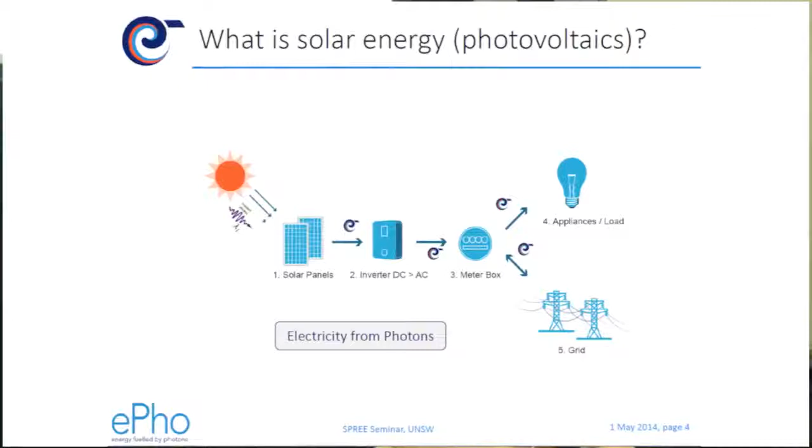They hit our solar panels, which convert the photons into DC electricity, direct current, which then gets converted into AC. That electricity is either used on the premises in appliances or loads, or it gets exported to the grid. At this stage, when we propose commercial solar, it's very rarely about off-grid or isolating a business from the grid. It's always just substituting the need of drawing electricity from the grid. That's what commercial solar is about for us.

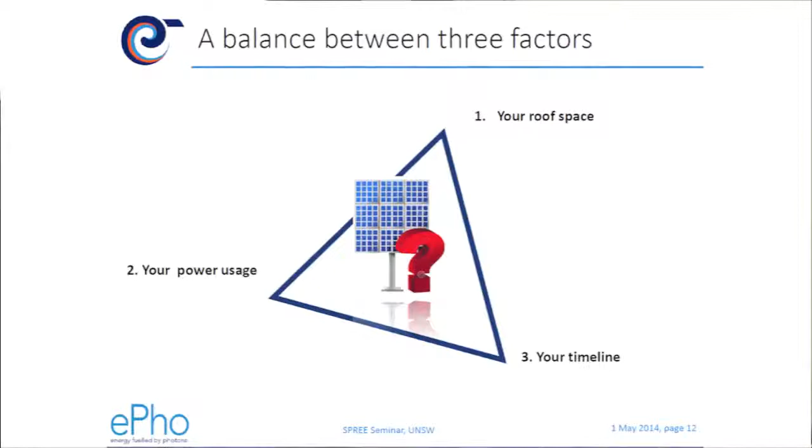Second thing is your power usage. If you are a restaurant and you only open at night, commercial solar just wouldn't work for you. That's one of the fundamentals. That's why I said earlier, at the moment we're really only talking about commercial solar to substitute electricity need from the grid. If you then talk about storage and other things, obviously everything changes. However, if you look at the economics, as soon as you package battery storage or other things into it, the economics don't stack up anymore at this point in time. It will over the next few years, but today, if you only look at the economics, it's only solar that substitutes your need from the grid that matters. So your power usage is very, very important.

And then timeline. So when we talk to clients, it's very important what they want to do with their business going forward. If they say, I want to sell my business next year or shut down, it's a very short conversation about solar - we might move on to the next topic. So timeline is a third factor that needs to make sense.

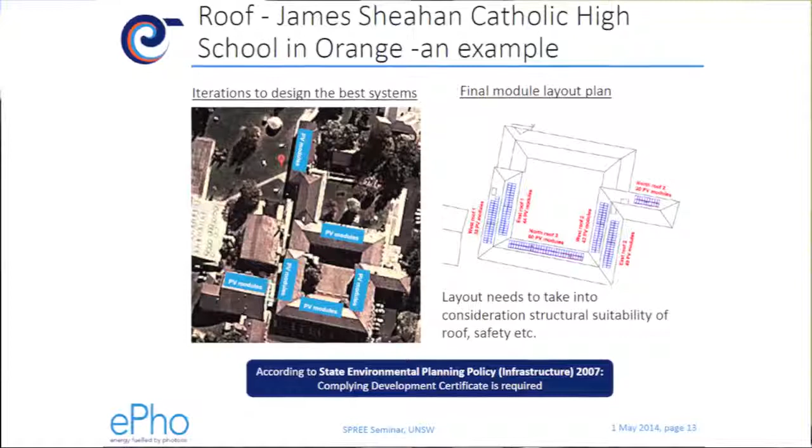Okay, let me just quickly run you through some stuff. This is an example of how it works in real life. This is a big Catholic high school out in Orange. Lots of roofs there, so we went through an iterative process to find the best roofs. At the beginning, it's really just a matter of marking some of the roofs that would be suitable, or potentially suitable, for solar.

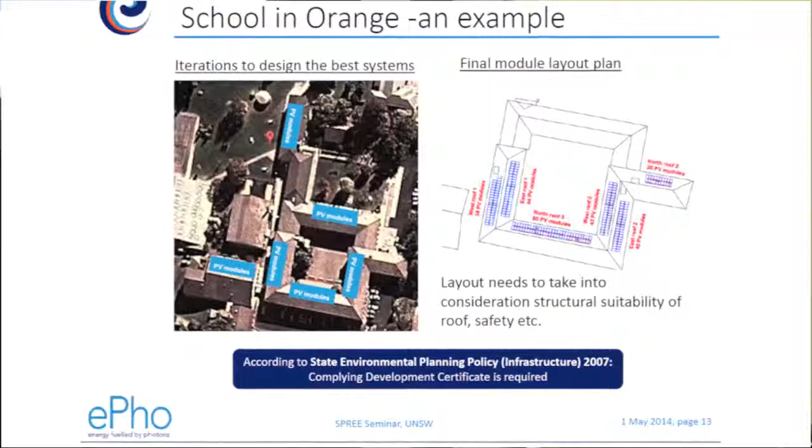And then we jump from there into the detailed layout where we do the proper design. In some cases, when the structural engineers come in and verify that the building or roof is actually suitable for solar, it might turn out that this wonderful north-facing roof is not suitable because it was built earlier, maybe in the 60s, and the roof structure is just not strong enough to carry the additional weight.

So we had to rule that out and went back to the drawing board and readjust it and try to measure that. Another thing which I put up here is one that we come across a lot at the moment here in Australia when we do commercial solar.

There are hundreds and hundreds of solar companies in Australia, ranging from very small ones, literally just a man and his ute, all the way up to big companies with hundreds of employees.

Normally, a residential system is installed by a guy who takes his 6 panels in the morning, drives to the residential home, gets out, climbs on the roof, puts the 6 panels on the roof, and walks off, and the job is done in 2 or 3 hours. No real design requirement, and very rarely is there a site visit up front. It doesn't really matter that much.

On commercial solar, however, the world changes. It varies a bit from state to state, but let's say in New South Wales, when you go over 10 kilowatts, you suddenly need a complying development certificate. It's not quite a development approval, but you need to go through council to get these certificates. You have to talk to the grid providers and so on. There are a lot of little things.

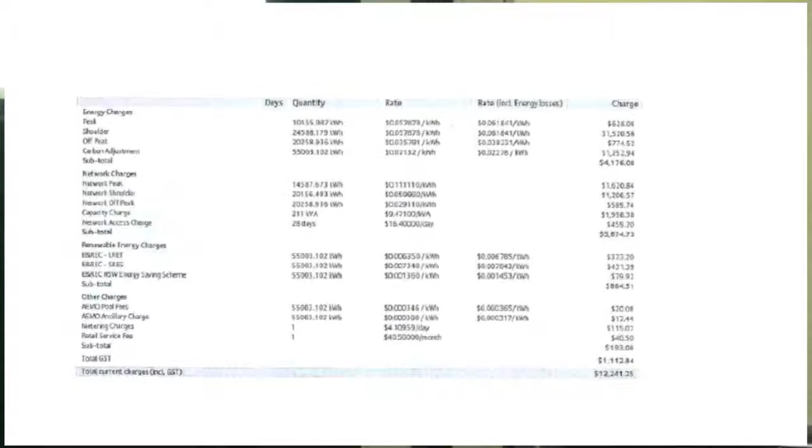If you then go to larger consumers of electricity, that changes dramatically. It's actually a real science to understand what's happening on these different bills. There are about a dozen or so different charges. Some of them are charged against cents per kilowatt hour, so the actual usage, some demand charges, some daily charges, and some other fixed charges.

So you have to plow through here and actually find out what your solar system would actually substitute. Obviously, a solar system doesn't substitute a daily fixed charge—that will be there whether you use solar or not, because you're still relying on the grid. So it's quite a lot of work to sift through this kind of information.

So once you have understood your electricity bill and you're basically trying to extract the value of your solar, the next thing you need to do is understand the consumption of your particular client. What is the commercial business actually using? In these circumstances, we get half-hourly data, so we analyze 17,520 data points over a 12 month period.

When you're a larger consumer, you basically get that data from your retailer, and they then pass it on to us, and we do a lot of number crunching. That's one part of the equation.

The other part of the equation is the generation profile of your solar system. There we basically run a simulation where we also throw in random weather data—we say, okay, we have a rainy day, we have a good sunshine day. Because it can happen that you have great sunshine on a Saturday or Sunday, but the business doesn't use any electricity on Saturdays and Sundays. You obviously have to take that into consideration when you evaluate the benefit of what solar is creating.

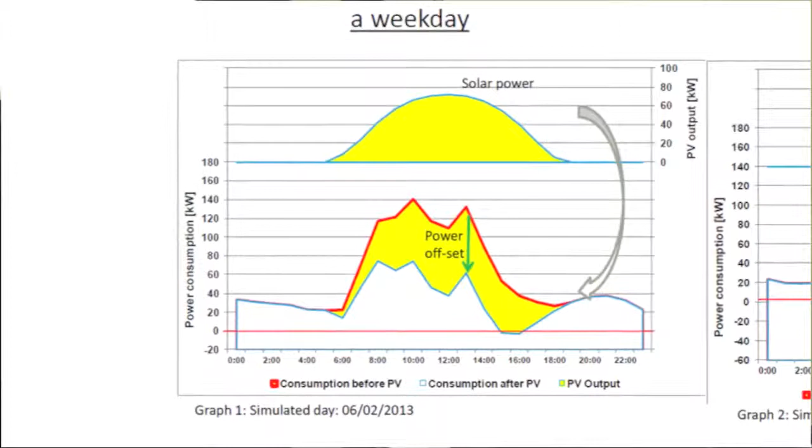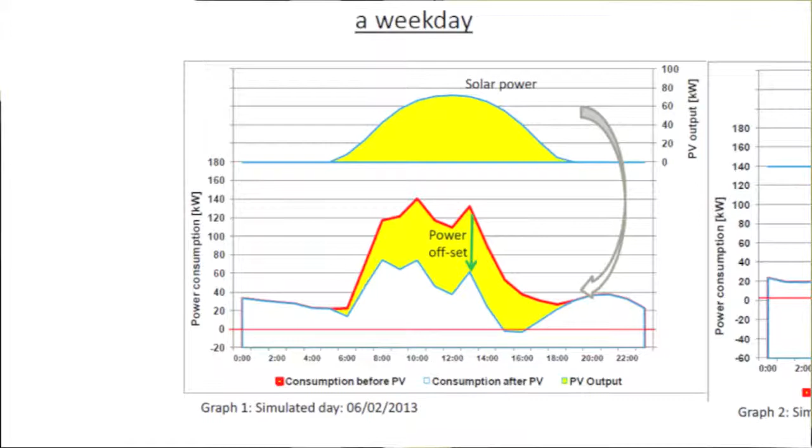The solar system on this particular day, the 6th of February 2013, would have produced this amount of electricity. It was a very nice sunny day, and this is what we would have offset. The new profile of the school would have been this little blue line. The yellow area is the savings the solar system would have generated - that's the value the commercial solar system has. On a weekend, you have that sunny day, but the school hardly uses any electricity, and most of it is fed into the grid.

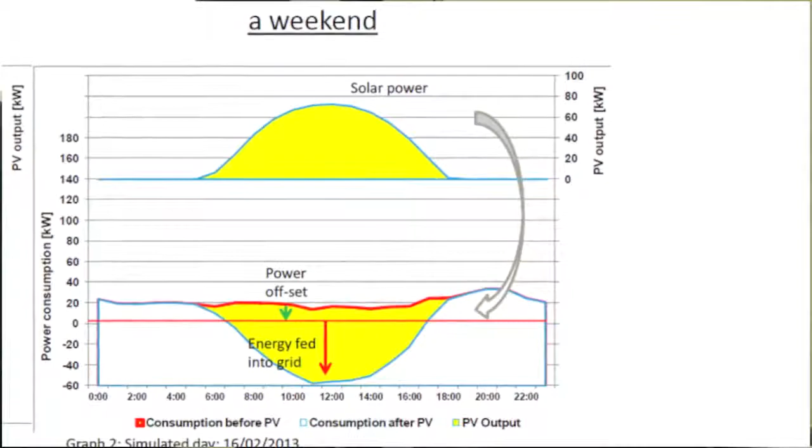Now the problem is, with most of the electricity fed into the grid, you get 0 cents per kilowatt hour - just the way it is. You might be able to negotiate something with your retailer, but it really depends on your buying power and your retailer.

So we go through that, day by day, and extract how much we would really save the school or the client. In this particular case, we will save the school about 30% of their electricity, and the school actually saves $30,000 per annum. They pay back the system in about 5 years. So it's a very good case, and because it's a Catholic school, they had the money as well to invest directly.

And that's quite an interesting concept, because in economics, normally when you have supply and demand, the price that a good should go to is actually the marginal cost of producing an extra unit of that product or good. Obviously here it's a kilowatt hour - that's the benefit, that's the good that's produced here.

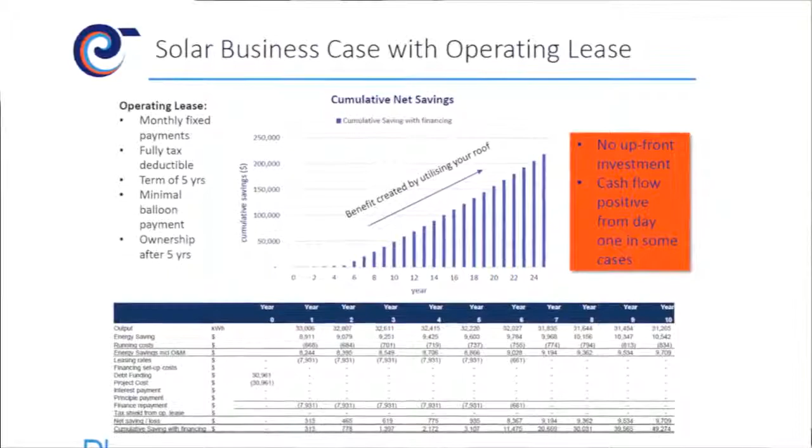What's happening here is basically that the solar system is financed by an operating lease. So just quickly, if you're not aware of the concept: normally when you go to the bank and you borrow money, or you have a finance lease, you're the owner of the system and you just pay your rates. Yes, the bank or the financing company might keep the right to the system, but in essence it's about you getting ownership of the system. Then the system is yours and you depreciate it over the 20 year period, and you pay back your principal and your interest. With an operating lease, it's very different.

You don't own the system. The operating lease is a pure expense, so it's fully tax deductible, which is a huge benefit for commercial businesses. Normally when you have your operating lease and let that run over 5 years, you have a minimal balloon payment at the end—this means you pay maybe one more month and then it becomes yours. So from your expense line on your P&L, it goes to your balance sheet.

The attractive thing is the following, you see it here. The first sort of 5 years during your operating lease, you're basically running a black zero, which means that whatever you're paying for your operating lease is offset by your savings from your electricity bill. In some cases, particularly for small to medium-sized businesses, it actually means they're saving money from day one, because their savings on the electricity bill is bigger than what they have to pay for the operating lease.

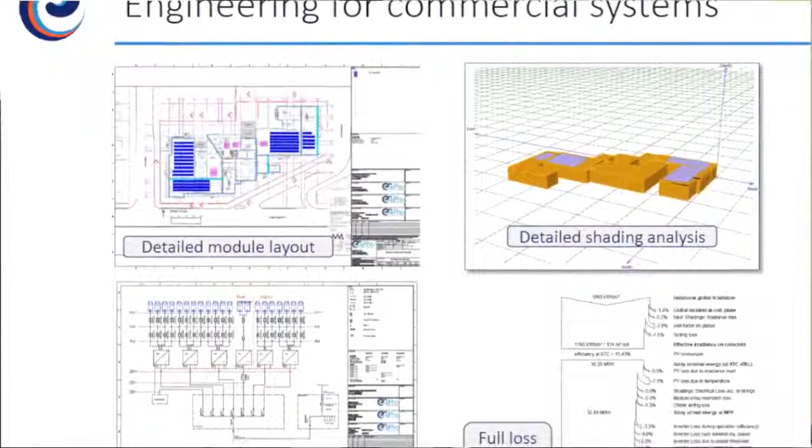And this is the stuff which I'm talking about - there is quite a lot of engineering work required. Now, this is a 100 kilowatt system on a new aged care facility, a big one, where we had to deal with a lot of HVAC stuff on the roofs, with fire escape stuff and so on and so forth, and we had to make it all fit nicely onto the roof space.

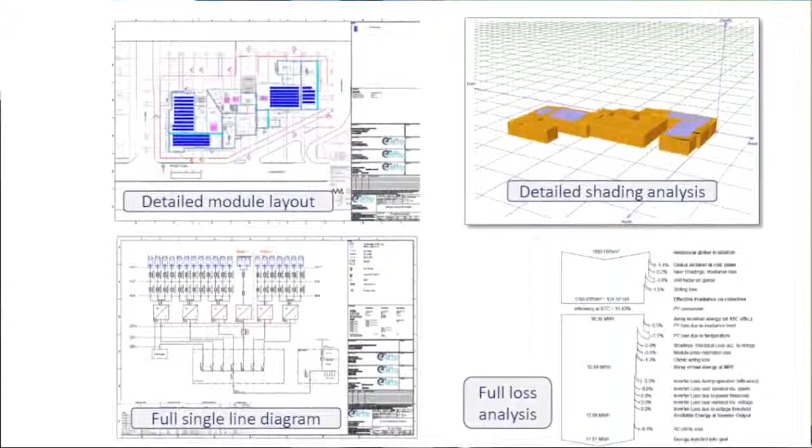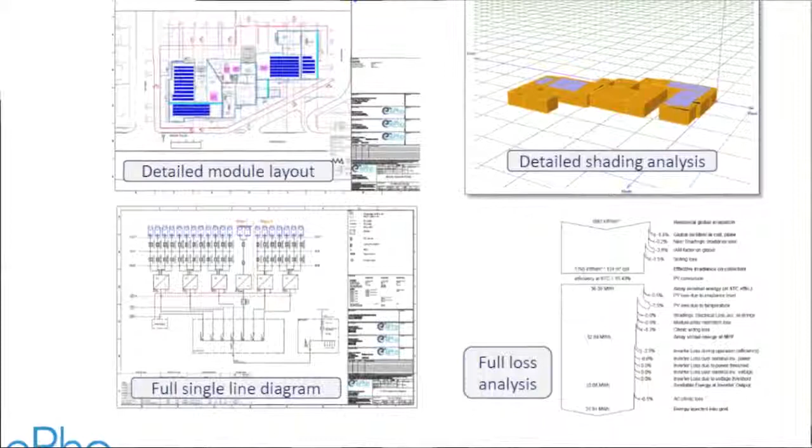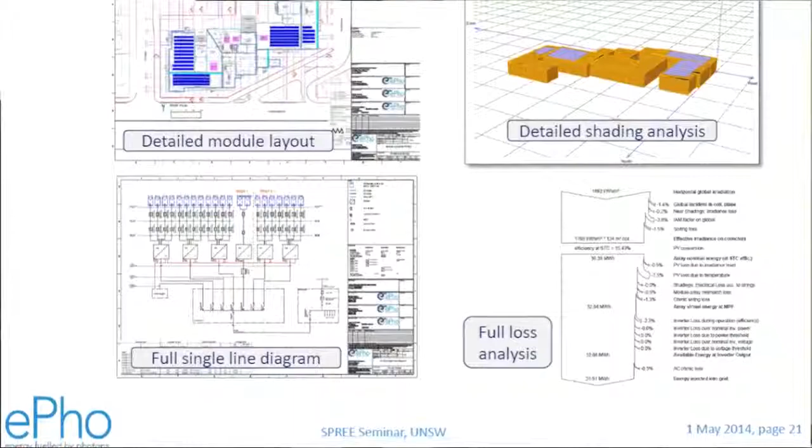We obviously then have all that different roof areas, and we do a detailed shading analysis. Obviously, if you have a larger system, you really need to be able to do the full single line diagram. You need to be able to talk on eye-to-eye level with the network provider to actually get the grid connection done. And you need to do a full loss analysis to know, well, this is the sunshine hours you get onto your roof. What do you actually get out at the end of the day after you subtracted all the soiling losses, shading losses, ohmic resistance in your cables, and so on and so forth. So there's quite a bit of work involved.

And if you want to go further, and I want to see if this works, you can actually go to some very extreme levels. In this circumstance, this is a building in North Sydney which has two massive billboards. And when we looked at it, we thought, why are we trying to actually put a solar system on there? It's really shaded. So we thought, okay, well, let's not just let our guts decide this. Let's do the full analysis. So we can.

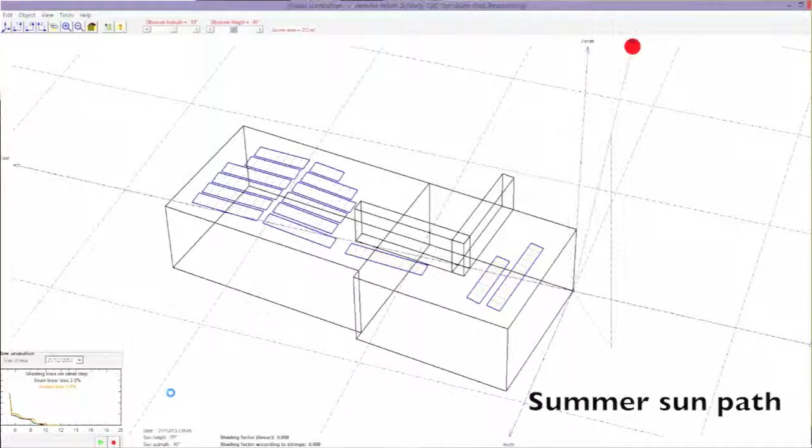There is supposed to be a movie where we really analyzed the path of the sun, summer and winter, where we exactly look at the shading during the day. In the summer, hardly any shading, and in the winter, when it obviously comes in much lower, we have more shading. And all this plays into extracting the value of the solar system to make the economic case for the client. So he's got all that at the moment, and we think the system still makes sense, so we are waiting on whether the client wants to go ahead or not.

Now, the other thing is what I said earlier, it is quite a lot of engineering work, and just this level of detail you have to watch out for.

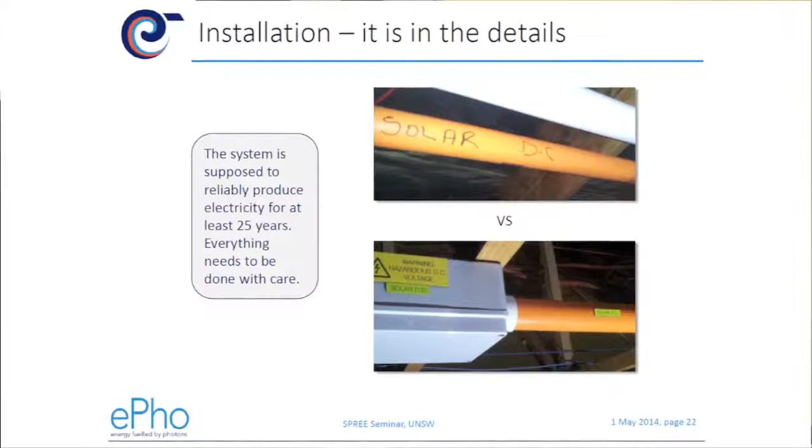The second part is really the installation. This is how typically residential systems get installed, and already this is a good installation because at least the conduits are marked. But in reality, if you think about the commercial systems where the investment can be 100,000, 200,000 or even more, do you really trust that this permanent marker is permanently on there for 25 years? I would doubt it, right?

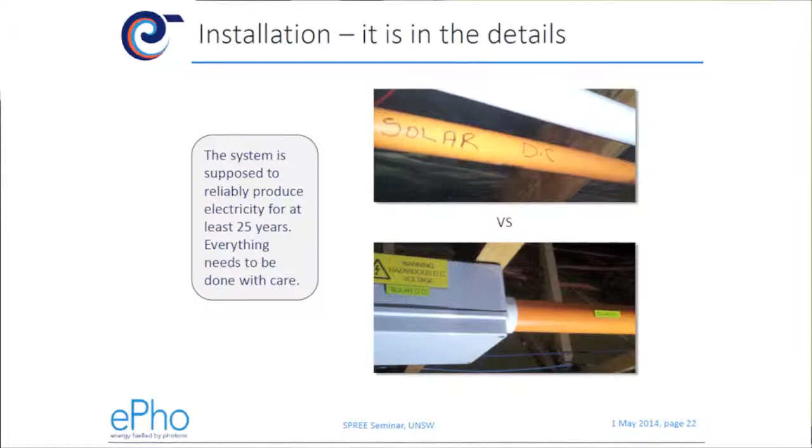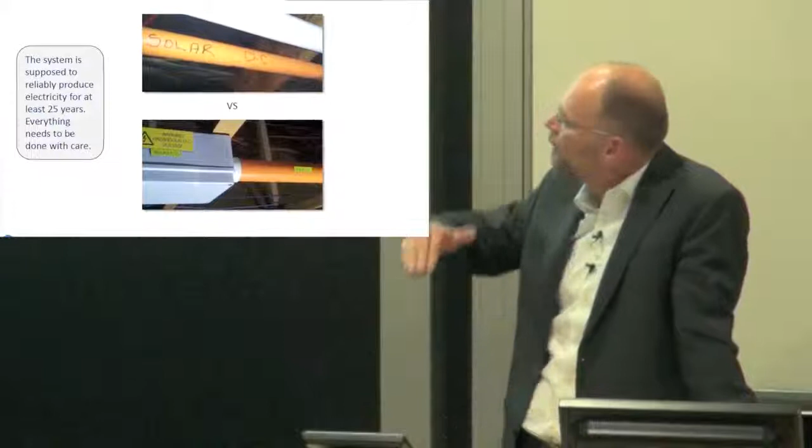So what we think, and how some companies work with quality assurance programs and something like that, you basically have proper, like in any other commercial electrical industry, that we do this properly. But believe it or not, it is quite a step up for the industry. Our Australian solar industry is completely geared towards the residential market, and it will be a general development which we have to live through in Australia.

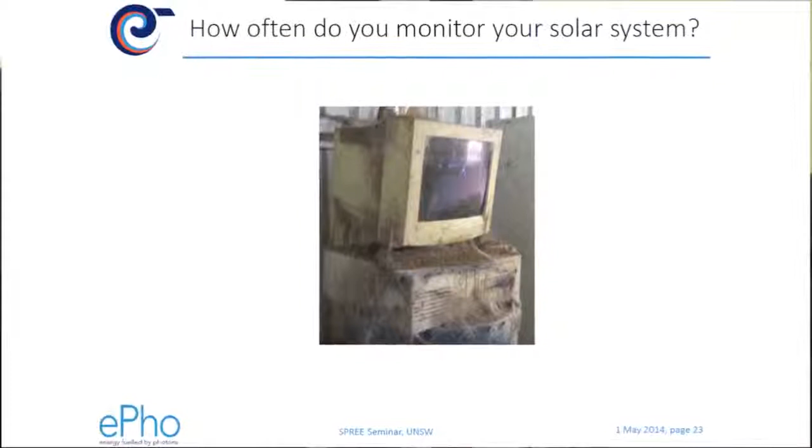The other thing is on the monitoring side. Less than 1% of solar systems are monitored in Australia, and that's quite remarkable considering the system is supposed to last for 25 years. My bet, and I think a lot of people would agree, is that we have a lot of solar systems in Australia that actually perform below what they should. For whatever reason, whether it's components, installation, trees or soiling, it doesn't matter, but people don't really check how well their system is performing.

This is obviously very different for commercial solar, because you are actually selling a return on investment and a value proposition. So you can go into a lot of detail on forecasting commercial solar. And one big factor you have to take into consideration is obviously the sunshine.

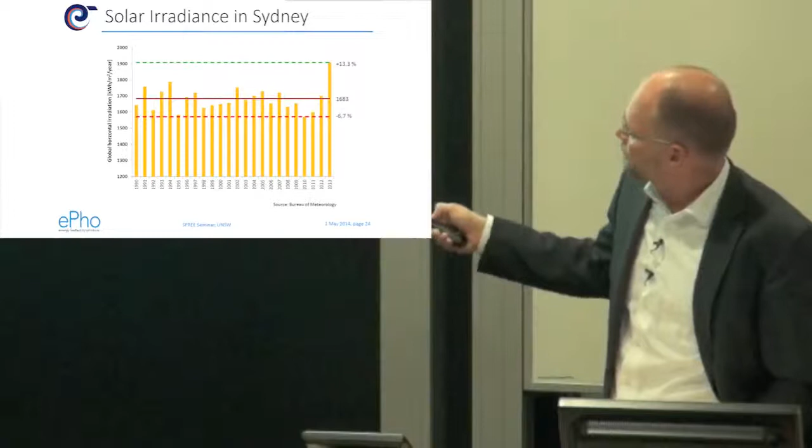It is fluctuating quite remarkably. This is Sydney, and you see the average sunshine data here from 1990 all the way to 2013, and you see the long-term average. That long-term average is what goes into your financial modeling, but in reality it can fluctuate quite significantly from year to year. If you have that honest discussion with your client and show them this is what can happen, you manage expectations quite differently than if you just take the long-term average and say, no, it'll be all right, mate. It might not be all right.

Now, when you put forward the economic case to your client, you also need to discuss with them what can happen, and what are the variances around this expected rate of return. If you're a bit more sophisticated and want a more honest discussion with your client, you can actually go into statistics and do probability analysis.

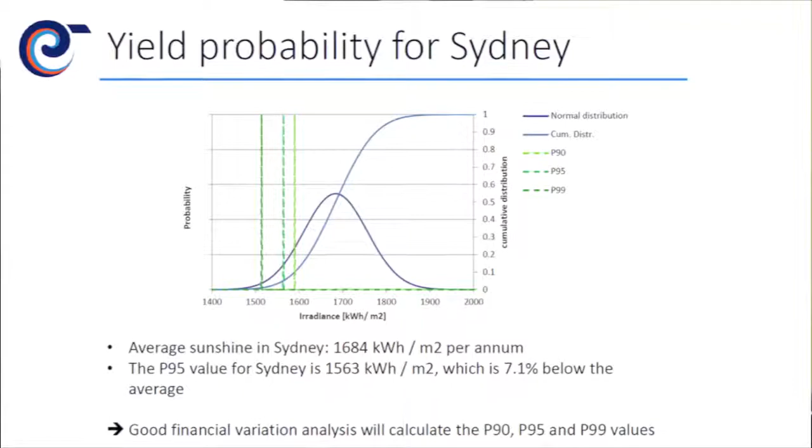What I showed you earlier was the annual sunshine in Sydney - that's basically the peak of this distribution curve. On average, we have about 1680 or 1690 kilowatt hours per square meter of sunshine, and we assume it's normally distributed. It's not quite correct, but it's an assumption we make to simplify things - it's just been too long since I learned statistics, so I take that simplification. You then see the cumulative distribution, which obviously at some stage goes towards 1, because the sun has to come up.

What you can then do is basically a P90, P95 and P99 analysis. For those who work in wind, it's a very clear concept there - it's basically the probability of 90% that you have a value greater than that P90 value. In wind that's standard practice; in solar it's not yet, but obviously you can do it - there's no reason why you can't.

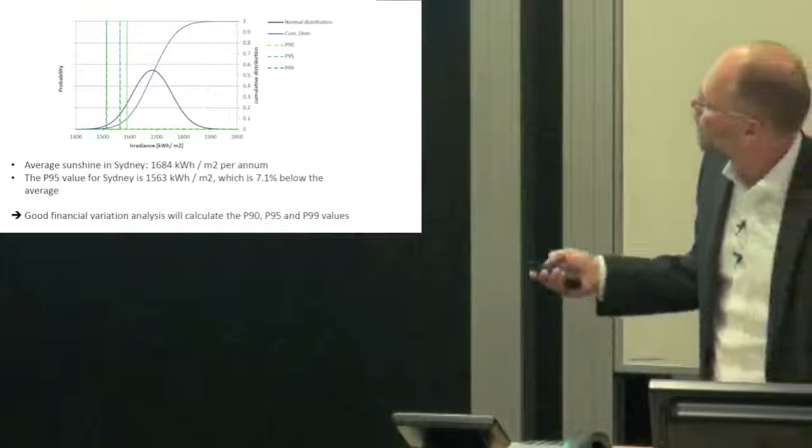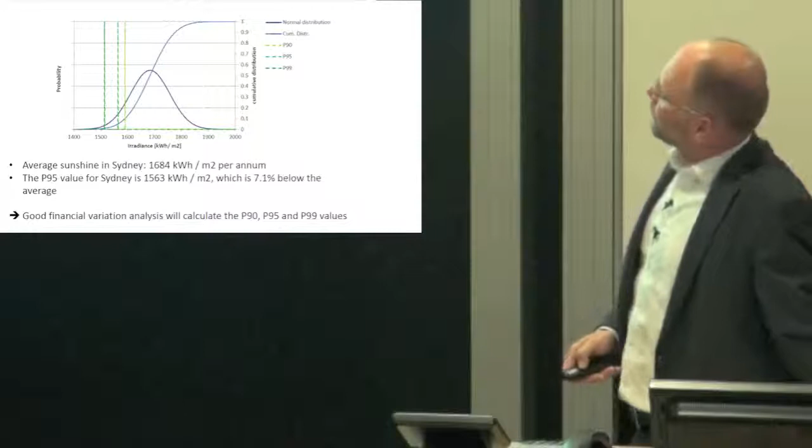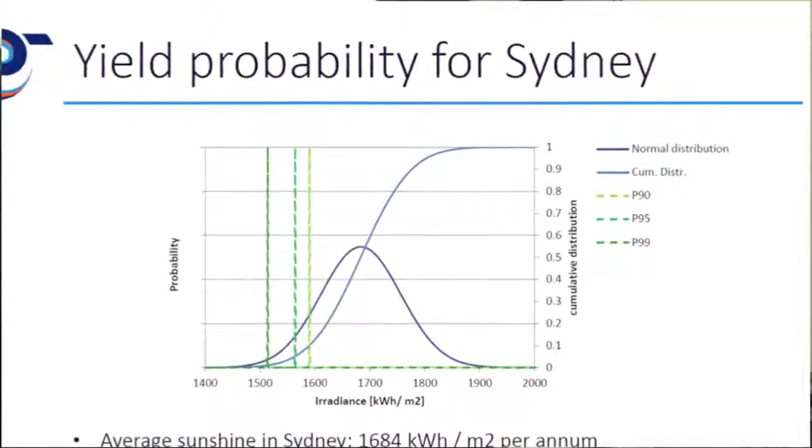So what you see here are the values of the P90, P95, and P99. If you wanted to tell your client, with a probability of 95% you will get that return per annum, you basically have to take your P95 value for your commercial analysis. In this case, for Sydney we have 1684 as the average value of sunshine. For a P95 analysis, you take 1563, which is about 7% below the long-term average - so with 95% probability your customer will get a return in that particular year if you use this value as an input for your sunshine data.

Through this, you can basically build a lot of credibility and trust with your client, particularly when accountants, auditors and others come in and try to challenge you on your value proposition. You can argue, okay, we've gone through this variance analysis - this is the case for solar, and this is the likelihood you will get 15, 20, or whatever percent return in any given year.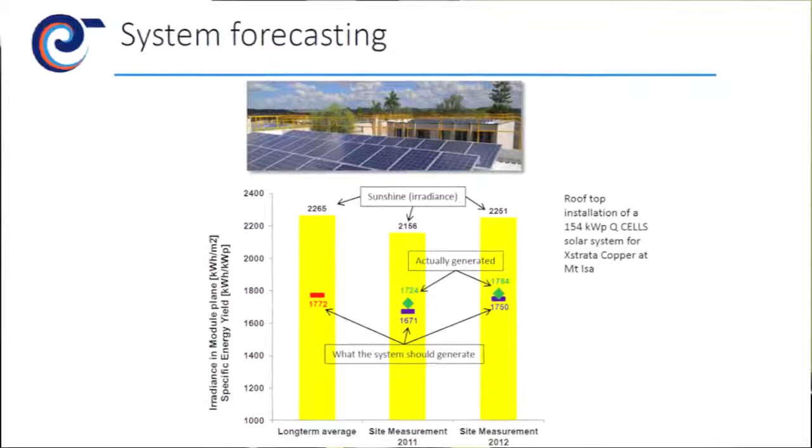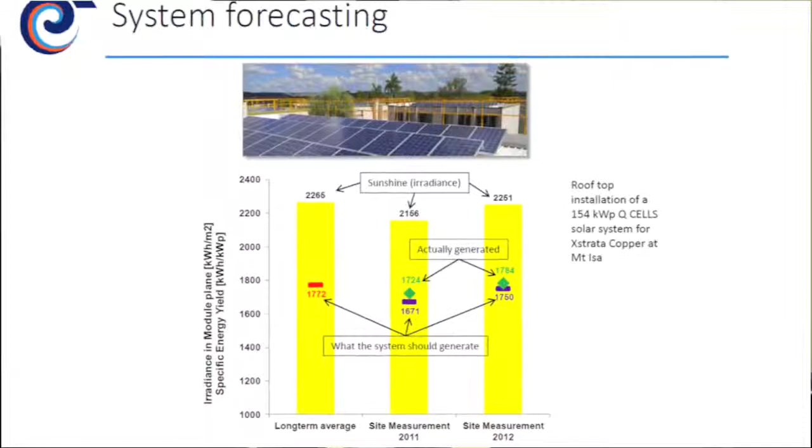All right, let's now look at the actual output of some systems with this fluctuation. Here's a system in Mount Isa, 154 kilowatts installed at the end of 2010. This yellow bar is the long-term sunshine average there, much higher than in Sydney. This value should give you an average output of around 1772 kilowatt hours per kilowatt peak.

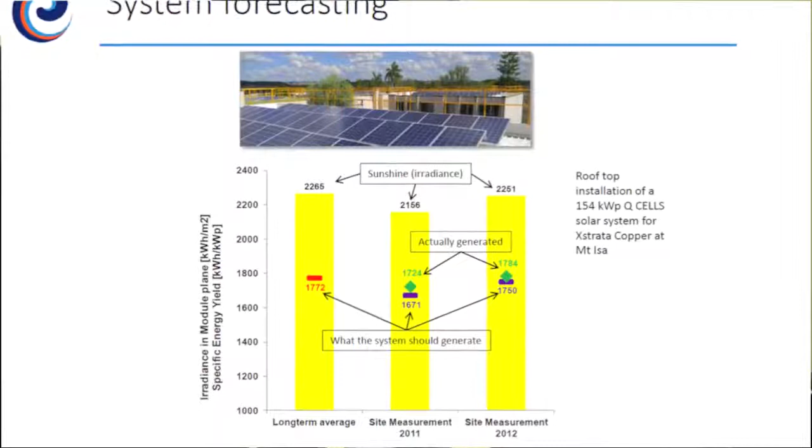In 2011, we had a little less sunshine. This is what the system should have produced with this lesser sunshine, and this is what it actually produced - pretty much spot on. 1724 was actually produced versus 1671.

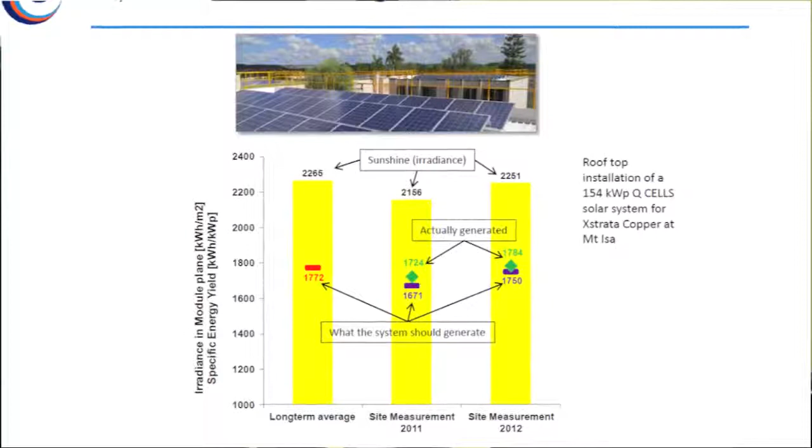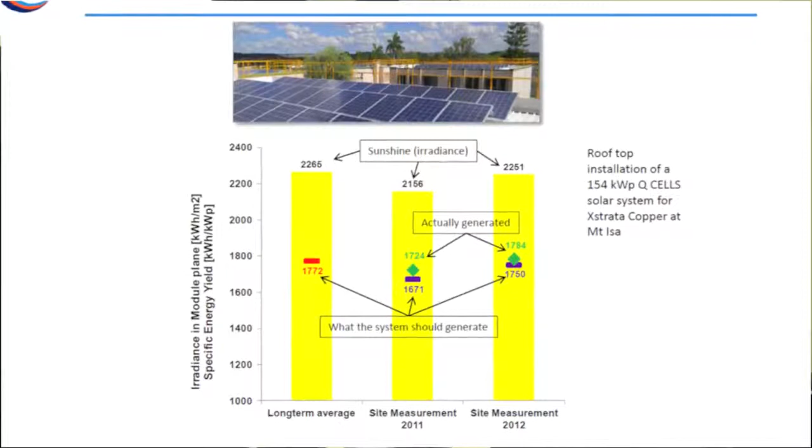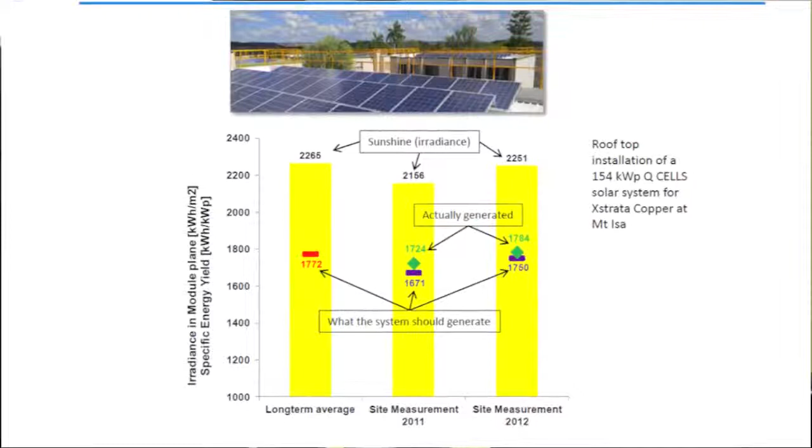In 2012, we had a bit more sunshine. Again, this violet bar is what the system should have produced using that actual value, and this is what it produced in real life. So solar is extremely predictable - you can really forecast. If you do the analysis and get the right data, you can really say what the system is going to produce over the coming years.

That brings me to the summary on this overview of the issues of commercial solar. What I find most exciting is this fundamental match between the generation profile of solar systems and the consumption profile of businesses in Australia. If you structure it properly on the financing side, it can be a value proposition that is cash flow positive from day one - the client doesn't have to invest an additional dollar. He has to commit to it, but he doesn't have to invest extra to get the benefit of solar. I also hopefully explained a couple of the pitfalls that are out there.